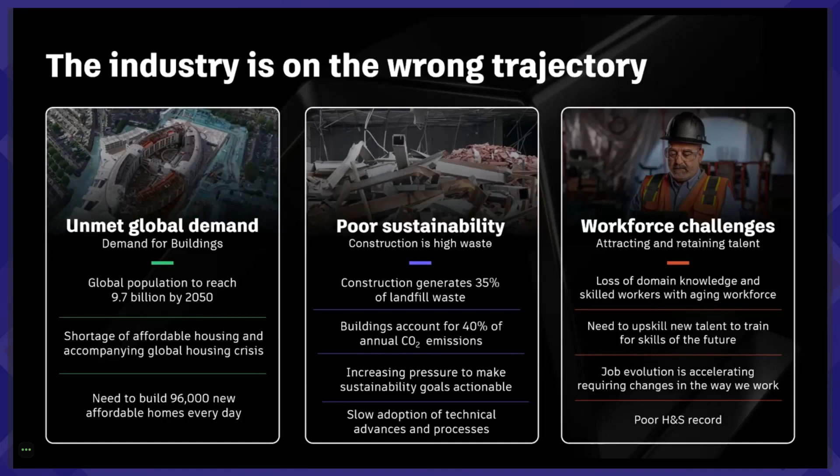Major challenges are driving the shift towards industrialised construction. We here at Autodesk believe the future of construction is a future that is industrialised. The concept of industrialised construction allows us to manufacture buildings much like we manufacture cars or electronics. The repeatability inherent in the manufacturing process allows us to scale construction processes.

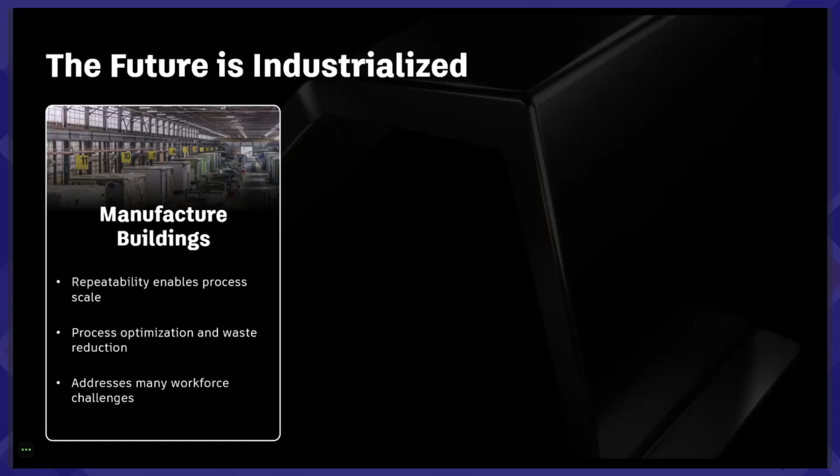This not only helps us meet the growing global demand for buildings, but also optimises the processes and reduces waste. Industrialised construction can also address several workforce challenges.

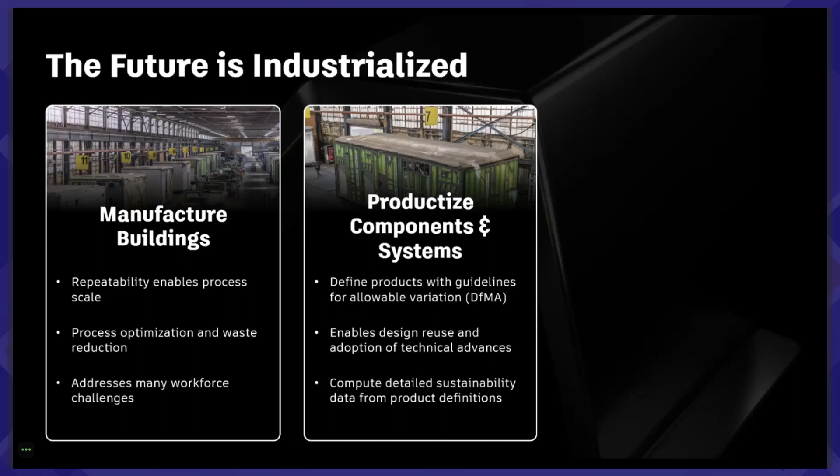Secondly, we can productize components and systems by defining products with guidelines, allowable variations and concepts known as Design for Manufacturing and Assembly, DFMA. We enable design reuse and the adoption of technical advances.

And lastly, designing with products can reduce the overall project risk. We can use customizable building products and systems to cater to diverse needs. This approach facilitates data-driven design using accurate data computed from components, ensuring we make informed decisions every step of the way.

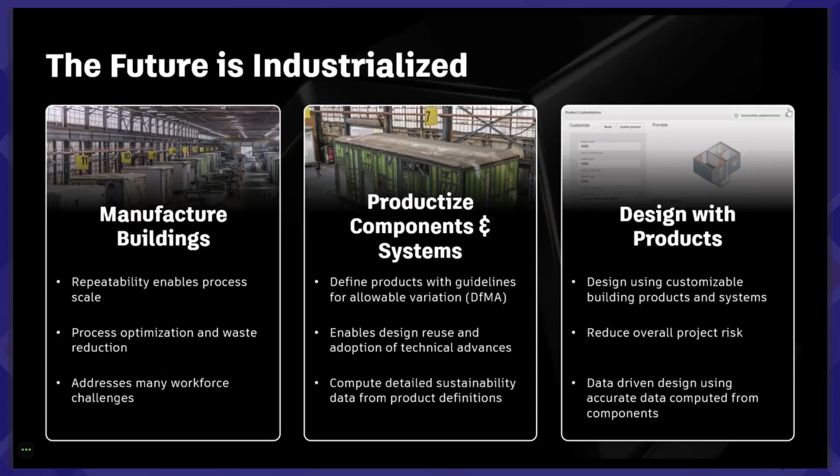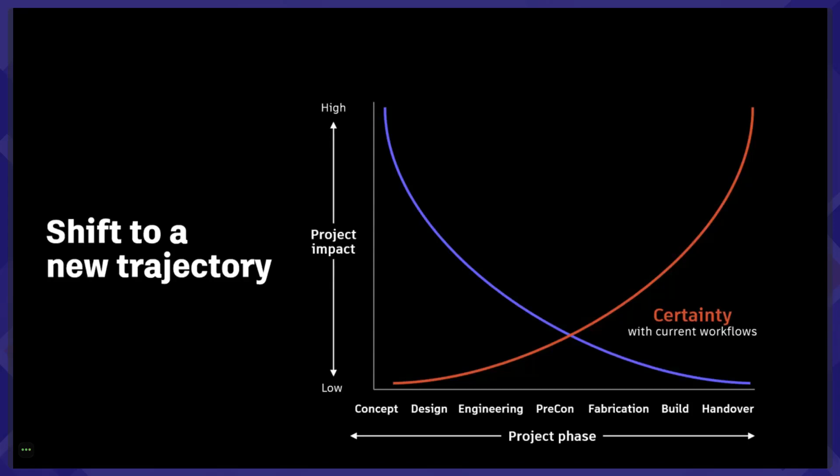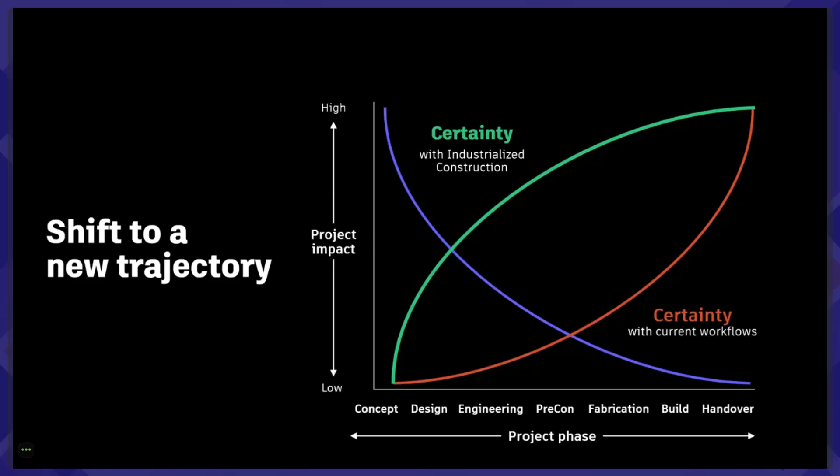If we take a look at the green curve, we can see the potential of industrialized construction. By starting projects with known suppliers and manufacturable components and building elements, we can dramatically increase certainty during the design phase. This productization allows architects to make validated choices during the design phase. As a downstream effect, it eliminates the manual and time-consuming processes for engineering, analysis and detailing.

Let's dig into the concept of productization a little bit more. One of the significant challenges architects or designers face in building design: imagine being an architect, crafting a beautiful, functional design for a building. One of the foremost concerns during this process is ensuring that the design choice made is manufacturable. It's crucial to know as early as possible whether particular design elements can be practically built or not.

However, the current solutions in the industry often fail to provide this crucial feedback in a timely manner. This delay and uncertainty can lead to costly redesigns and project delays, impacting the overall efficiency and success of construction projects.

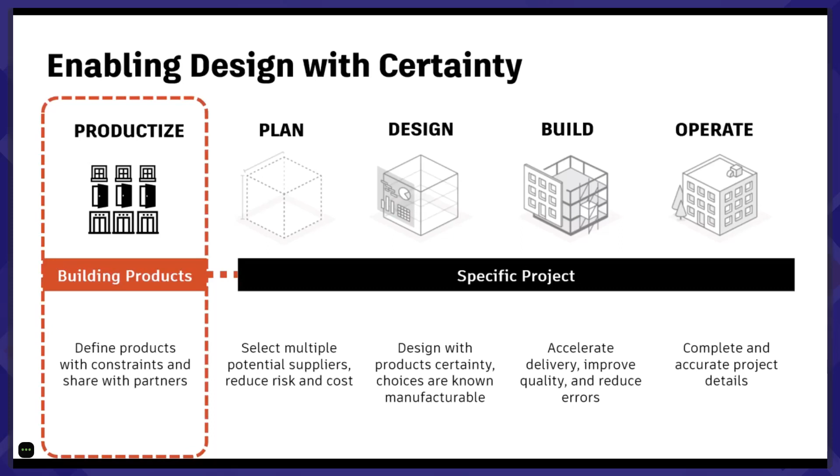This shift in perspective enables us to look at construction from a productization standpoint, which occurs outside the normal plan, design, build and operate process. This approach allows for a definition, design and reuse of products and assemblies within their constraints across various projects. This not only streamlines our work, but also enhances efficiency.

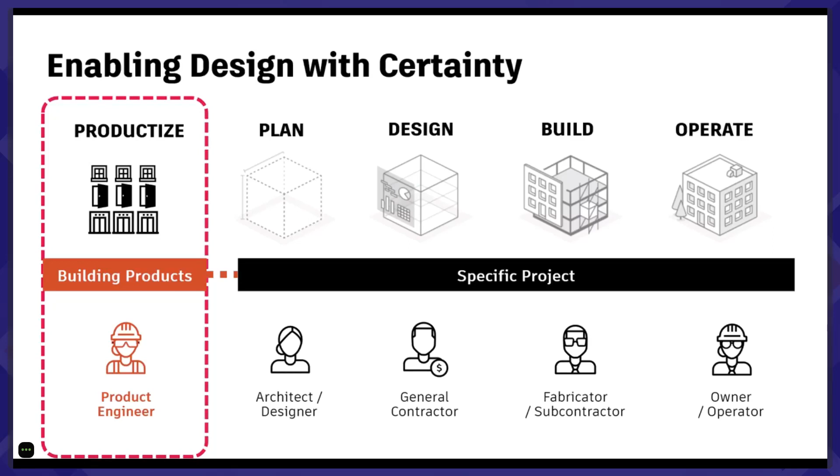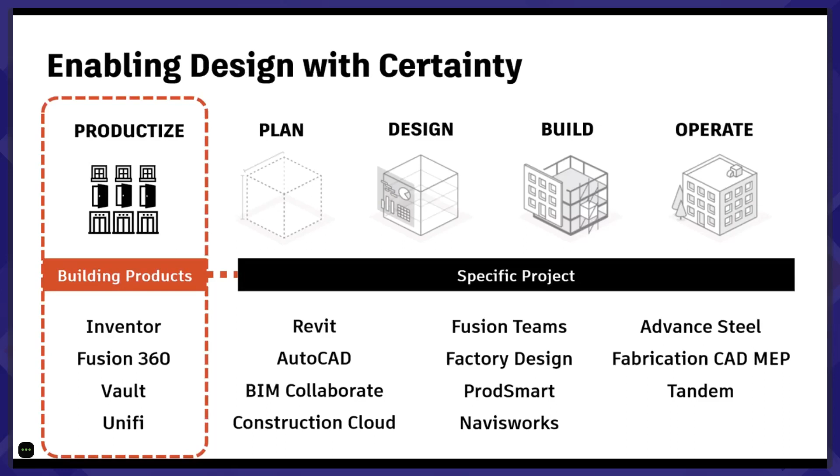Productization sees the emergence of the product engineer persona in the AEC space, the person responsible for the definition of products, assemblies and building systems. And through productization, we see the ecosystem exposed to a broader range of Autodesk technologies to enable the AEC and manufacturing converged workflows.

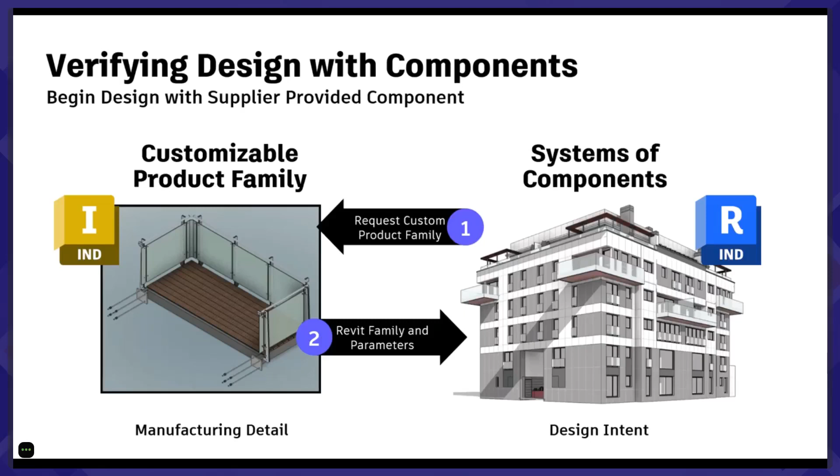Let me introduce you to Autodesk Informed Design. We can begin the design process with components provided by suppliers. These are not generic placeholders, but real customizable components that are part of a product family, designed and optimized in tools like Autodesk Inventor. Instead of starting from scratch, architects or design professionals can integrate these predefined systems of components directly into their Revit design models. This approach fundamentally changes design processes.

Let me tell you a little bit more about our connected workflow. We are publishing with rules, customizing based on those rules, and generating documents at scale. So the product engineer can input the specific rules, set all those properties required for the designer, but then also look at the level of detail for the model itself.

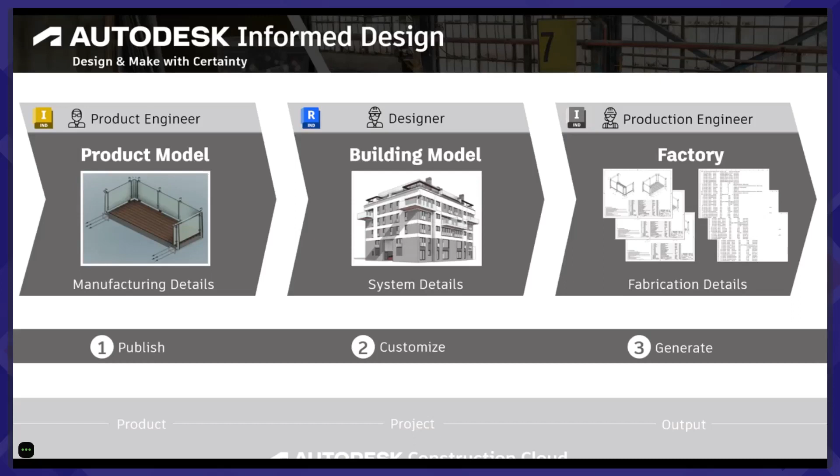The designer can customize and configure within the limits required, using the right level of detail, and also use the information provided within the component in their model. And then finally, the production engineer can generate all the outputs at scale as required, such as bill of materials, drawings, and neutral 3D formats where required. And this information then can be published back into the ACC docs environment for all people to access.

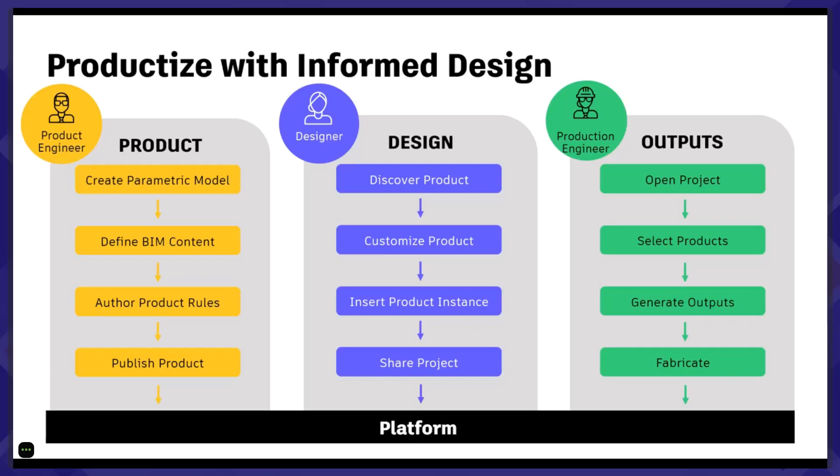Before we get started, I just want to help you better understand the personas we are using during this demonstration. So we have a product engineer who creates the product definition for a manufacturing purpose. Next, we have the designer, who is the persona who utilizes the product definition in their design models. And finally, we have the production engineer who discovers the design model to generate the required output for manufacturing or fabrication. So let's jump into the product and have a look.

Now let's turn our attention to the role of the product engineer and the powerful tool they have at their disposal inside Inventor.

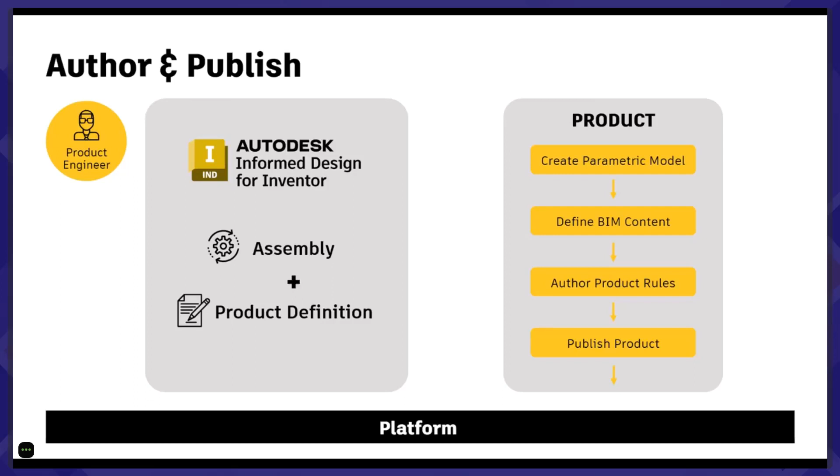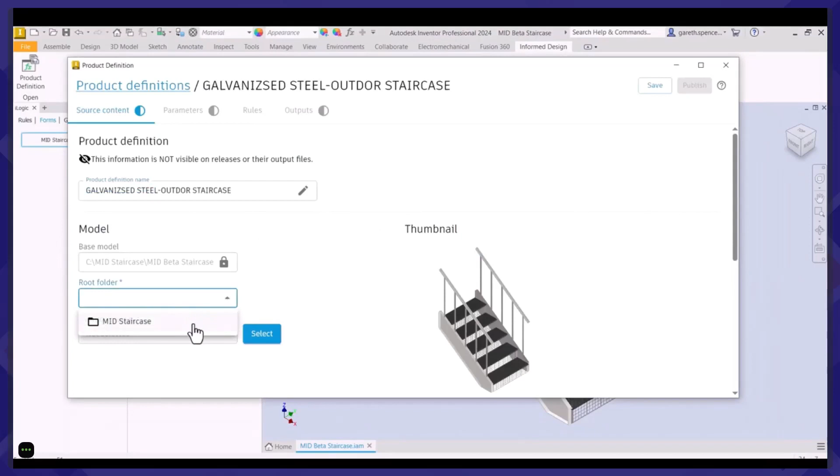With the Informed Design for Inventor approach, manufacturers can utilize CAD tools to infuse their product models with detailed product specifications, rules, and constraints. It is a transformation step involving our designs becoming more informed and accurate for practical, real-world application. Consider a product engineer working inside Inventor.

They can create a parametric model that is adaptable and flexible. They can define the building information modeling content that encapsulates the product's physical and functional characteristics. They can author product rules that govern how the product behaves. They can also publish a comprehensive product definition.

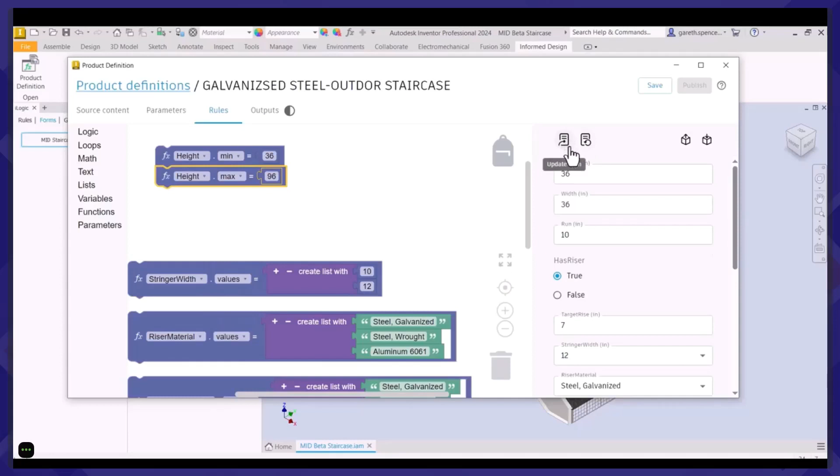But this capability extends far beyond creating a digital representation of a product. We're not just representing the product digitally, we're defining its behavior, its flexibility for customization, and limitations or constraints. This provides a detailed understanding of the product that goes beyond its physical appearance.

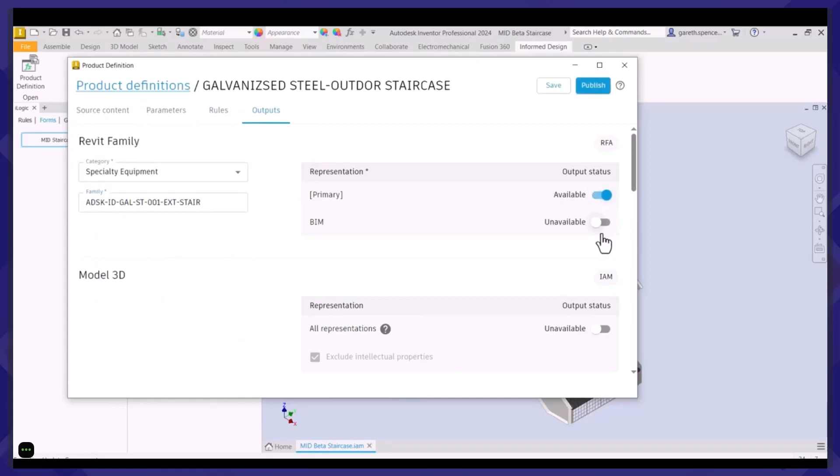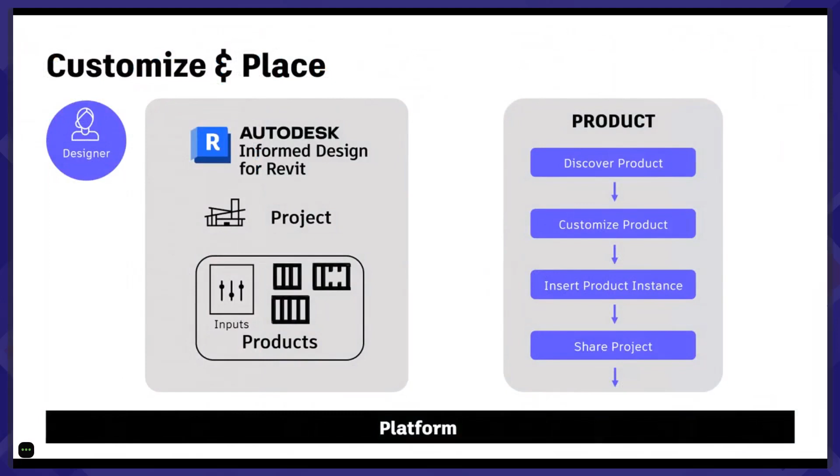This rich, detailed information is invaluable for designers. When the product engineer shares this information with the designers, they provide crucial insights about the products being incorporated into the designs. It's about mutual understanding and collaboration between design and manufacturing stages. This shared knowledge helps bridge the gap between design and manufacturing and encapsulates the architect's vision to achieve alignment with manufacturing capabilities.

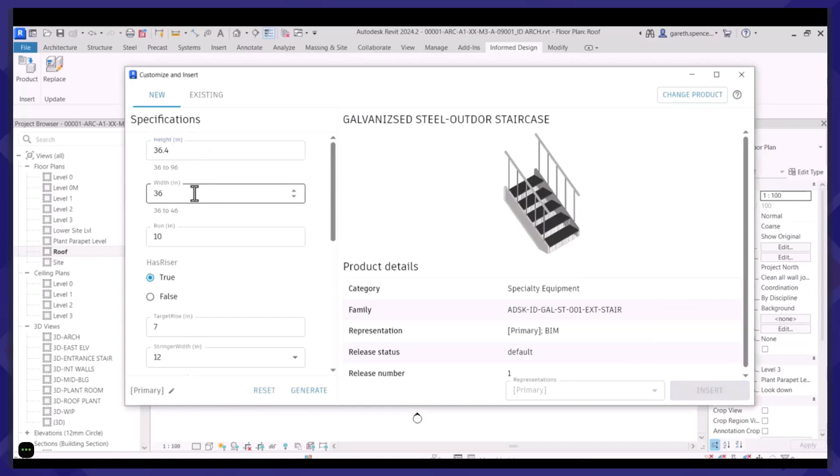Now let's look at how designers can leverage the power of Informed Design for Revit to enhance their design process. Once the product engineer has created and published their product definitions using Inventor, these models become accessible to designers and become a valuable resource. Using Informed Design for Revit, designers can explore these product models and interact with them, customize them, and seamlessly integrate them directly into their building design.

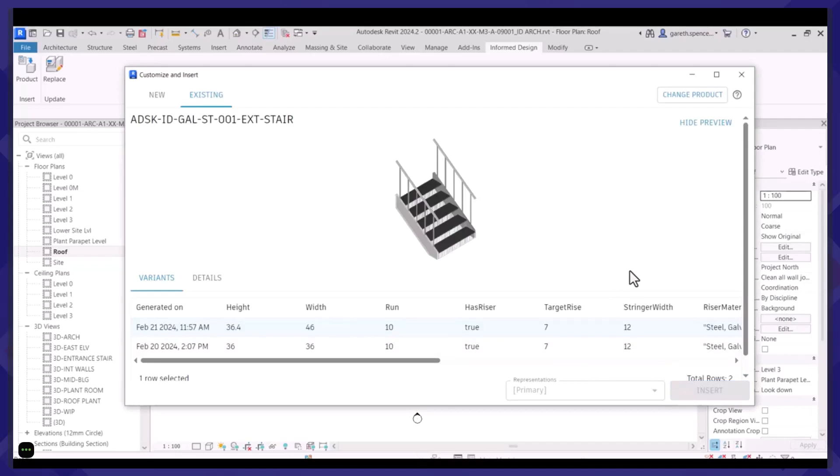This starts with discovery. Designers can search through the product models available, finding the right products that fit their design requirements. Next comes customization. Designers can tweak these product models as needed, ensuring they align perfectly with their design vision. And finally, designers can insert the instances of the customized product directly into their building designs. It's a seamlessly efficient process that brings design and manufacturing closer than ever before.

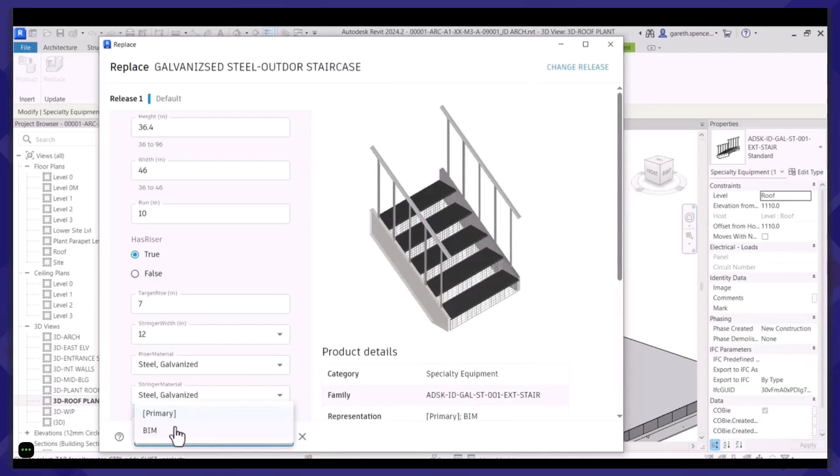This approach offers a significant advantage, as designers no longer insert an abstract or work with hypotheticals. Instead, they're using known manufactured building components, transforming their designs from hypothetical concept to practical building designs. Using Autodesk Docs, designers can share these product models with the entire project design team and, importantly, back to the product manufacturer. This shared access fosters collaboration, keeping all stakeholders informed, aligned, and working towards a common goal.

Now let's look at the production engineer and how they can harness the power of Autodesk technology to automatically generate manufacturing documentation from design models.

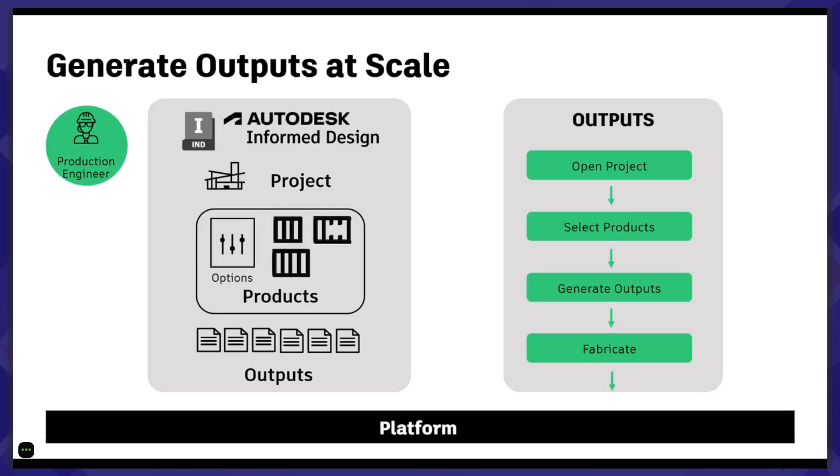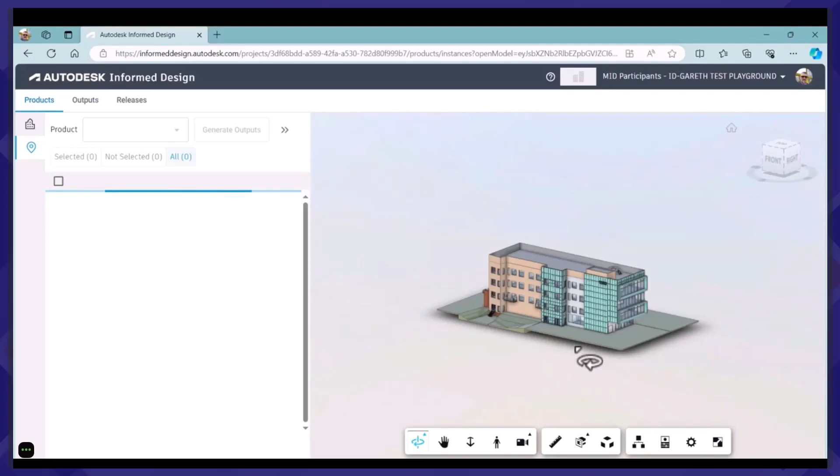The Informed Design web application integrates seamlessly with Autodesk Docs. This integration allows us to access, manage, and share files with ease. This process, traditionally handled by the manufacturer, is now simplified and streamlined. This means they can effortlessly output files such as bills of materials, drawings, and 3D models in various formats.

The beauty of this is there's now no need to revert back into the Inventor models for use in the production and manufacturing process. The production engineer can select the required products to generate the specific outputs, which can be saved directly back into the Autodesk Docs project, ready to be viewed, downloaded, or shared with other parties involved in the project.

The benefits of this approach are twofold. Firstly, it minimizes the potential for errors by eliminating the need for redundant steps. And secondly, and significantly, it boosts productivity by facilitating a smooth, more efficient transition from design to production, allowing all stakeholders to design and make with certainty.

Imagine a future where construction is not just about building, but about manufacturing. That's the future we envision at Autodesk. We are thrilled about the potential of industrialized construction. Let's start with where we are today.

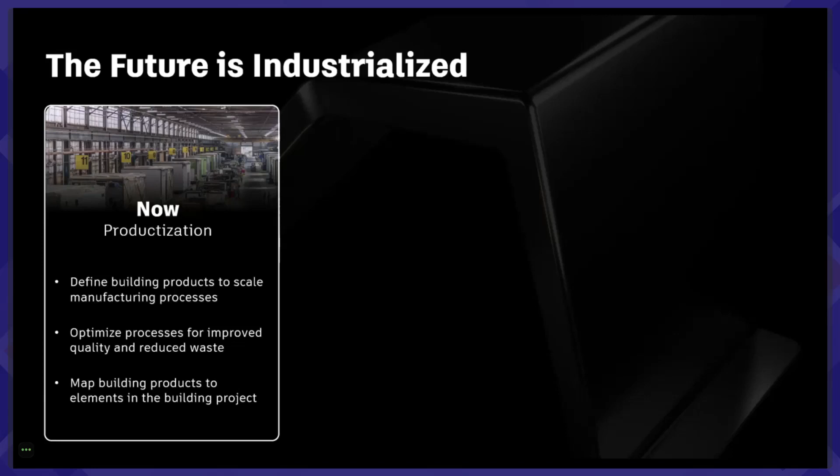With Autodesk Informed Design, we're pioneering the concept of productization. As you've seen in our product demonstration, this approach demonstrates the way we plan, design, and build. Moving forward, we're developing ways to help the industry design with guardrails. This means mapping the building products to elements of the building design to scale.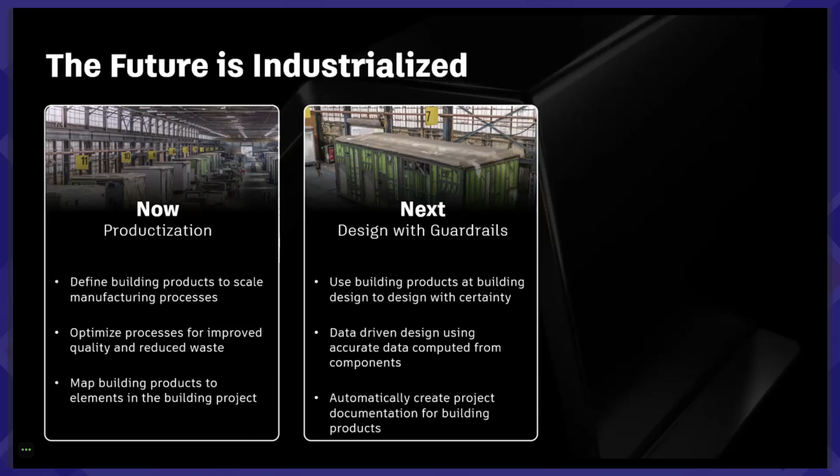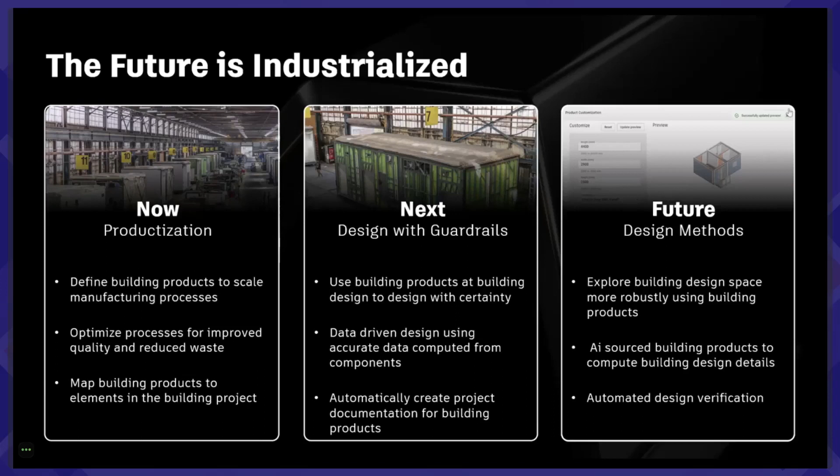It's about ensuring accuracy and certainty while giving designers the freedom to create. Looking ahead, we see these developments as a stepping stone towards a future of generative AI-based design. We believe this technology will be the foundation of construction in the future, enabling a level of precision, efficiency, and certainty that we've never seen before.

Having just witnessed the power of our solution in the demonstration, let's delve deeper into what makes up our offering. Our solution isn't just a single tool, it's a trio of components designed to revolutionize your work processes. First up, we have an Inventor add-in which empowers you to author and publish building product templates with ease.

Secondly, we have an add-in for Revit, which allows architects or design professionals to customize and place building products into your projects, transforming the way you design. And lastly, we have the web application that automatically creates the project outputs. This is where the magic really happens.

And that's not all. Each of these components seamlessly integrates with Autodesk Docs, satisfying your storage needs. A single entitlement unlocks all three components for both Inventor and the Product Design Collection, as well as Revit and the AEC Collection. When it comes to cost, we've structured our pricing reflectively, and to start off with, the initial offering period, there's no charge to use the service.